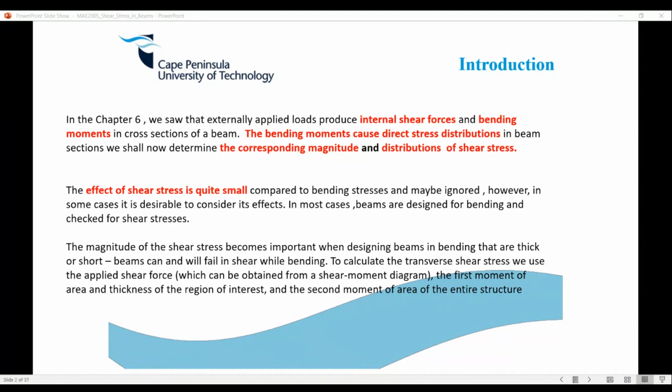And let's move on, so yeah, I'll get that slide shifted, which I'll shift. But anyway, right, so when we're looking at a beam being loaded, let me just quickly copy and paste the beam here, just for my own sanity. I must tell you, sometimes you guys really make me feel sorry for you, man - the amount of work you guys have. But anyway, sorry. Where is this? I'm just gonna find a random beam, just bear with me.

Oh man, now it's sticking, I'm not getting what I want here. I'm just gonna choose a beam here. Let me just go to the end. Yeah, this is just some mock-up, don't worry too much, just a picture of a beam. I just want to paste it because when I talk about it, you guys have some image in your mind of what I'm talking about. Okay, I've got a beam here. Yeah okay cool, I'll just take this beam here.

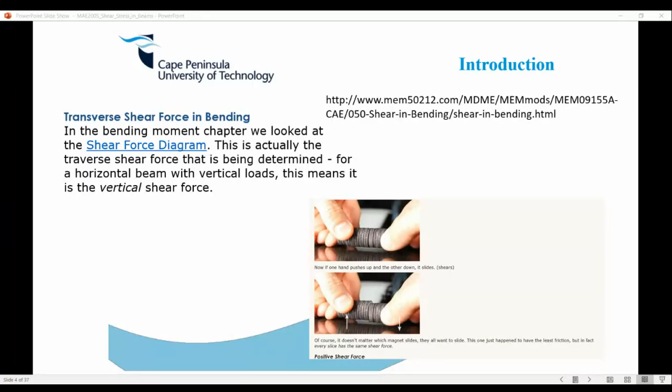There are two kinds of shear force we'll be looking at. The first one is the transverse shear force, which is essentially the vertical loads on a horizontal beam causing vertical shear. This is from the website I was talking about, I'll just paste it now.

It's titled longitudinal shear in bending. It says in addition to transverse shear force, a longitudinal shear force also exists within the beam. Evidence of this longitudinal shear force, parallel to the beam axis, is shown below. So this is what we're looking at.

Imagine some planks laid on top of each other. In figure A, we apply a load, it begins to bend, and we find in B there's some sliding happening between the surfaces of each plank.

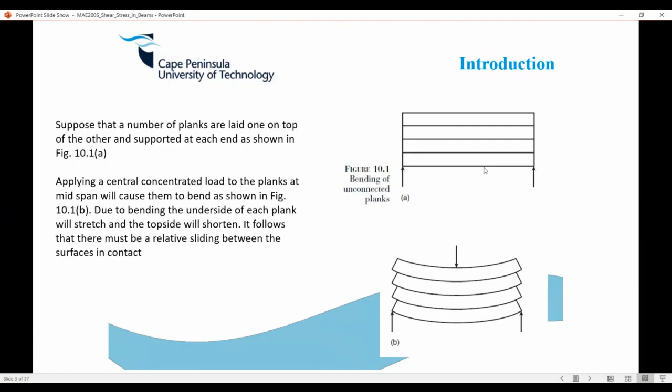Applying a center concentrated load to the planks at midspan causes them to bend, shown in figure 10.1b. Due to bending, the underside of each plank stretches and the top side shortens. We're familiar with that. It follows that there must be some relative sliding between the surfaces in contact - a very simple way of putting it, that's basically what it is.

Because of this load, and the way the material structure works, we've got this horizontal counterpart happening. Using the same example, if the planks are glued together, no slippage occurs, and the glue which keeps the beams together induces a shear stress.

So it sounds like a bit of a vague concept, and I can agree. However, there is a real reason why it's there, and if you do more advanced things, it actually becomes more obvious. So I'm making you aware that this transverse shear is basically related to longitudinal shear, and based on that there's a relationship between the two of them.

What they basically say is that the transverse and longitudinal shear forces produce stresses called vertical and horizontal shear stresses. So what tends to happen - you take a small element, load the beam up, and you find there are shear stresses on all sides of the beam, the vertical ones and the horizontal ones.

This is a new revelation. These stresses are shown on a small part of the beam in the figure above. At any particular point in the beam, the horizontal stress is equal to the vertical stress, so fortunately they have the same magnitude, meaning we're able to compute them.

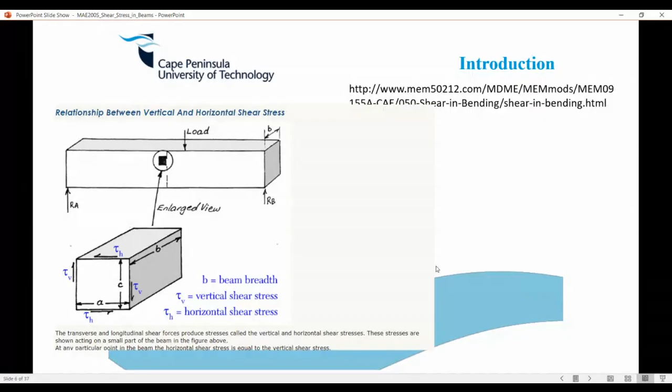Just be aware that even though the beam is going to fail vertically - that's the vertical shear or transverse shear - there's also longitudinal shear forces. Now I was going to touch on that one, okay, this is going to continue there.

This is just continuing on the same thing. I've referenced that over there. I'm going to touch on maybe one or two examples I found last night, so I'm excited to use one or two there, basically just proving that the shear force is the same - be aware there's a vertical and horizontal shear force happening.

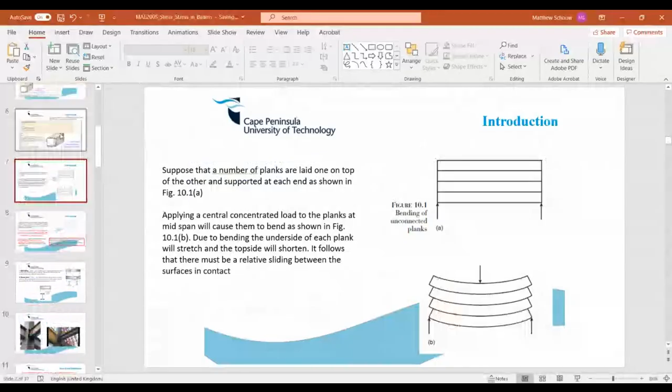In keeping with the previous slide - this is where this was supposed to be, I actually just added the slides, hence the jump around. So this is touching on the same thing, basically telling you again that there is this so-called longitudinal shear force within the beam.

It's important to note this is important in the design of connections, say between a concrete slab and the flange of an I steel beam, where connections - usually steel studs or bolts - are subjected to horizontal shear. This is particularly important more for the analysis of joints we are doing.

If you've done some analysis, which you're supposed to do in connection design - looking at rivets, welding joints, and bolts - there's a whole essential materials analysis based on that. So this horizontal shear force, what we're going to compute, is actually one of the main criteria to look at.

I didn't touch on this in the previous lecture, but there are ways a beam can fail - in fact 6 different primary ways a beam can fail, or they can occur in combination.

One would be web wrinkling, and one would be fastener failure. In both cases, the web wrinkling failure is due to horizontal shear - you can pick up on the direction of that fracture line. The fastener failure is the same: there are horizontal shear forces, say a rivet holding the cover plates to a W beam, failing in shear. That's induced by the load on top, which is the longitudinal shear force we're talking about.

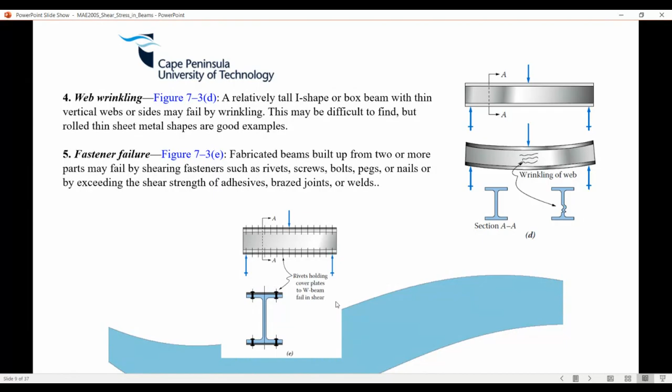What is the relationship between the shear force and bending? Think of the shear force and bending moment diagram and tell me some relationships about it, in terms of like if you had a graph or something. Maybe I can find a basic one here. You can tell me.

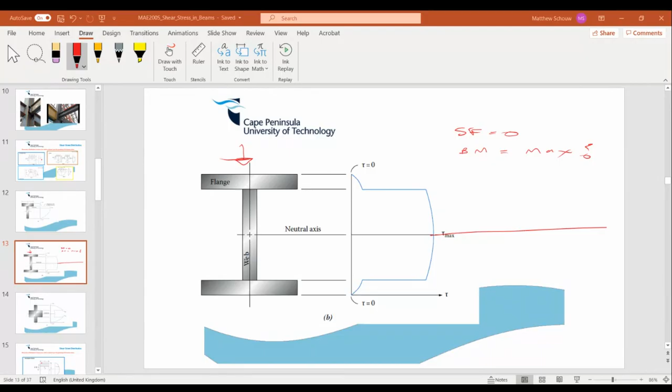Assuming we're applying a load here, obviously, the standard - how did it look like? You guys remember? It looked like a trapezium, didn't it? Or like, not like a Z. It looked like a... yeah, there we go, that helps.

I think what I'm looking for is, its top is being compressed, right? The tensile top is being compressed, so let's just say a line like this. Oh man, yeah, you can see my graphics tablet's pen is here, but anyway. So I had these so-called trapezium shapes or right angle triangles - some call it a trapezium as well.

What is important to note is that you can see at the top, the flanges carry where the shear force was 0. We found out that the bending moment is a maximum - it makes sense. And at the bottom, at the neutral axis, where basically no bending occurs, you find a maximum shear force. So that's a new revelation. And what's important about the I-beam, although it's designed - you might get a free bonus mark question - is that the flanges carry all the bending and basically the web carries all the shear. That's how they designed it.

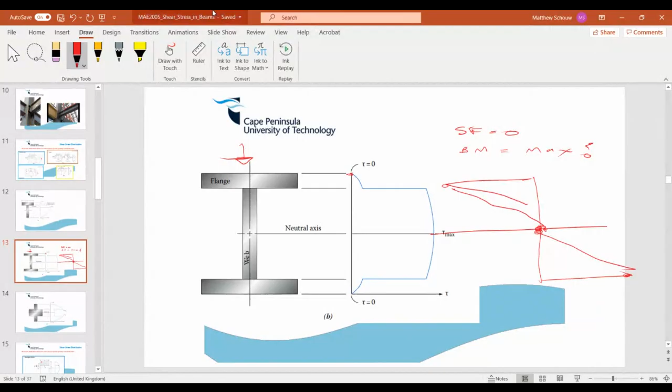Obviously for this it'll be completely different - we had a different case over here, an I-beam like this. So that's just a new revelation on the so-called shear stress distribution. I want to make you aware that you will be required to compute the distribution for an I-beam, so you should really put a lot of emphasis on mastering that.

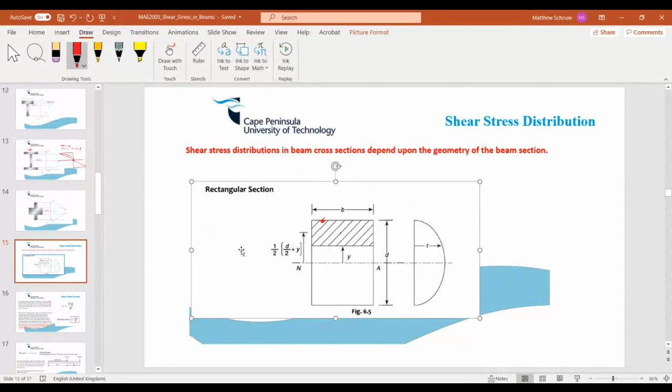I did mention that the shear stress distribution in the beam depends on geometry. Yeah, we had to look at a few of those anyway. So finally, what's missing here?

It's just the derivation of this, and I don't want to spend too much time on that. It is in a note which I've posted, and it's arguably self-explanatory. Obviously, you don't have to know all the how it's actually done. There's a few notes I've posted, and I'll just copy the thing here. It'll look like this.

If someone can find this textbook, really, I will be eternally grateful. I really don't know what textbook it is. I'll just quickly duplicate this and paste it here. So it's not really of importance, but it's one of the notes there.

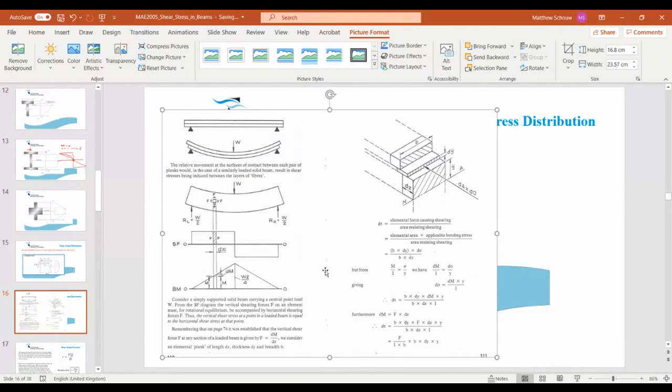And what it is doing here is basically showing you how the formula which I'll be talking about now has basically been derived, right? So you can have a look at that. And the main model we'll be looking at is this guy over here. I'm sure it's in your textbook, you've seen it.

And it's going to be, so it's basically your shear stress. To find the magnitude of it, it's going to be V, which is the maximum shear force, A, which is your area of the particular section you're looking at, Y bar is also with respect to that particular section we're looking at. And we divide it by the second moment of area, the total second moment of area of the object, times the breadth of the object, right?

So we're going to look at basic shapes, so at least if you can master those, you should be okay. They're saying, so in the normal other types of, what's the word I'm looking for? Man, I'm getting a headache of this now. Just bear with me, sorry.

Okay, it does work now. Let me just quickly see. Yeah, it works, okay.

They have AY as Q, however we just use it as AY. So Q, AY, but this is the one we use here, okay?

This is just a small note here, but they say determining Q or AY is the more challenging part of these problems. This requires a lot of practice, and I agree, a lot of people get confused on how to take that particular thing. Obviously, I'll try to break it down as best as I can so that you understand, and of course delineating the sections.

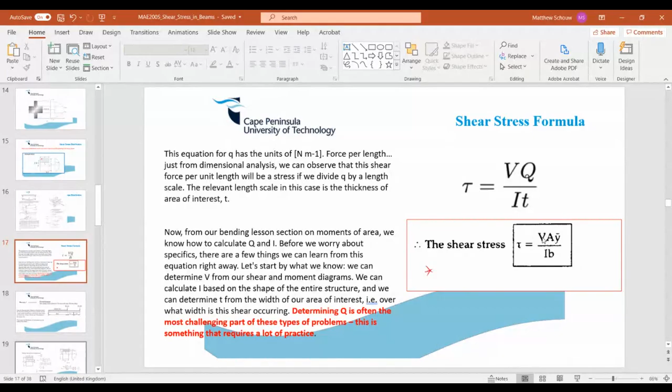Okay, so we can finally start on the first example. If you do want to follow along with your notes, maybe this is the first note in the additional notes. It's called additional notes on shear stress beam in Beams 2. You can download it and have a look through it.

I love this note really. I think it even has very nice questions here. But I really want this textbook though. Someone can find it for me, I'll be eternally grateful. I've been looking for this textbook.

So you can just get that note ready, and we can actually start solving the problem. So we're going to actually start solving now, and I think getting on. So I hope you guys got the basic concept, obviously.

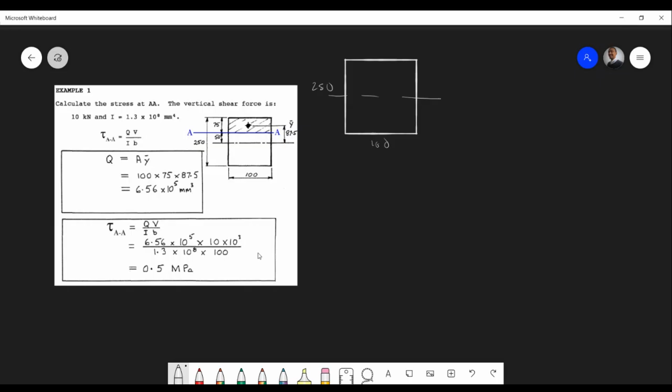We have this beam, and they give us a vertical shear force of 10 kilonewtons. So they give you Vmax. Normally they'll give you Vmax, or I'll request you to work out Vmax, and I'll demonstrate those times when we have to work that out. And obviously we have I here, normally we have to work out I, but fortunately they've given it to us. So it's 1.3 times 10 to the 8 millimeters to the fourth.

So in our SI units, what is that? Can someone just work that in meters for me? So this is like a teaser of some sort, of how this works.

Our formula is like this over IB. So can I just get the I beam? Obviously the I is worked out the same way as before. We know the BD, we can actually work it out now. Maybe let's just work it out. Let me just get my calculator quickly.

Where is my calculator? It's in the car. Okay, so I'm just going to work out my second one. It should be the same. I'm just using my Casio here on the computer.

So it's going to be 0.1 times 0.25 cubed divided by 12. We all can do that. Obviously, depending on the XX, so it's 130 point... no, it just went away. Times 10 to the power minus 4. 130 how much? I want to times 10 to the power minus 6. So it's 130.208. Okay, so yeah, anyway, it's the same thing.

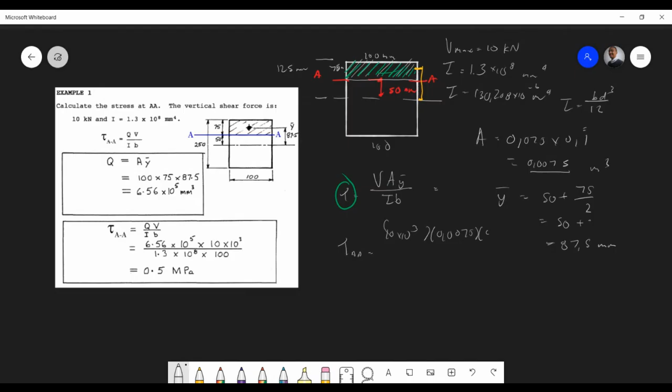Y bar is 0.0875. I beam, it stays constant, which will be the 130.208 times B, and B is 0.1. So B is this counterpart for this approach, it stays constant, right? And so we can get AA.

But you're going to find the magnitudes are normally very small, and that is why they have somewhat negligible effect on the beam. So you appreciate once you start getting into the bigger stuff why this is important. Last year was a challenging time. So what is that shear stress in section AA?

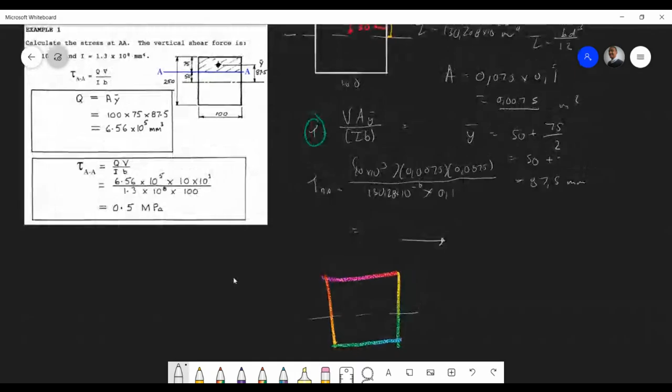Can someone give that to me?

Okay, 504 kilopascals. Beautiful, right. This is well within 1, 2, 3, 4 marks.

So what I want you guys to do now for me is quickly compute the shears in section BB, and BB is 100 millimeters away from the neutral axis, right? So that's BB, just a quick exercise to warm you up.

Thank you, Mr. Kiefer, yeah that's a lot better. So can you see small magnitudes, right? Doesn't affect much in the beam. It's not within the 200, 300 range - megapascal, this is kPa. So very small effect.

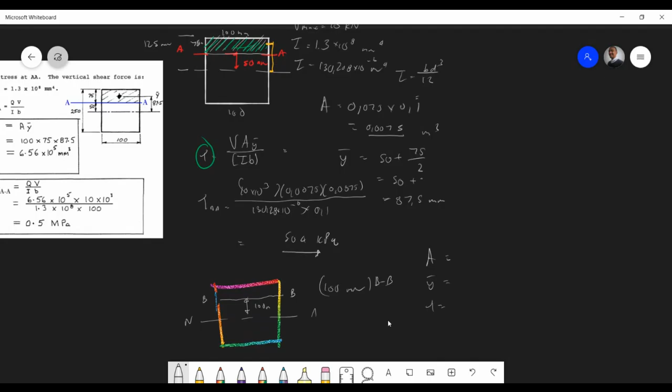Yeah, but you know, anything happens with you guys. So for this one, if we're 100 millimeters away now, the area in question is going to be this over here, right?

And obviously that's still going to be 100. That's going to be now 25. So that's your new area, it's 100 times 25, whatever that is there. Obviously it's in millimeters squared.

Mr. Keeper, can I ask you, how do I know that answer is correct? How do we know that answer is correct? Because I gave it to you, sir.

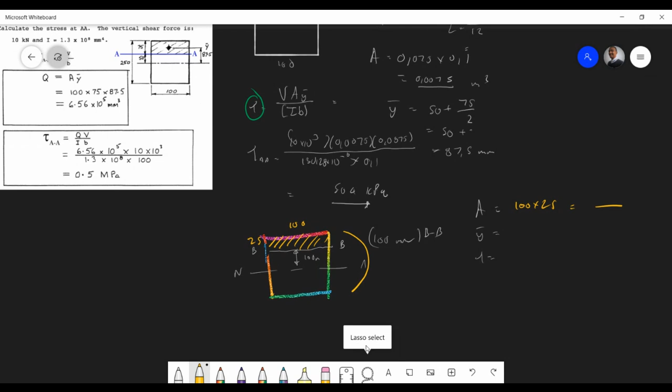Yes, for sure. Yeah, I don't know. Give me a second to think about it. It will be proportional to the first answer we get, because it's all on that same triangle.

So there's some proportion - on the left, on the equal sign, is equal to what's on the right on the equal sign. So I think what I want to say is decreasing. Remember, there's no shear force there, and it starts basically decreasing as it's going up. We're actually going up along the beam here. Doesn't make sense - so the maximum will be here.

But obviously it is proportional with that shape - the shape is a parabolic shape, by the way. But yeah, I'm happy with this answer. There's 216, so it's 216 kilopascals, right?

So there's a small exercise like this which continues along the length of the beam. I think that's what we'll be doing. Okay, so I'm quite happy with that. So if you're able to understand that concept, especially with the areas, that's a good thing.

And then touching on the next example, which I'll just move along here. It's also from the website, so I highly recommend you checking the website out.

I mean, when I just found it last night, you know, it's one of those things - I'm glad it's just breaking down these concepts for me.

In this case, it's the same beam, and we need to find it at the neutral axis. It's the same exercise as before, but when we find it at the neutral axis, we consider the whole area. It's the same amount of force, everything - same example, so we just find the whole area.

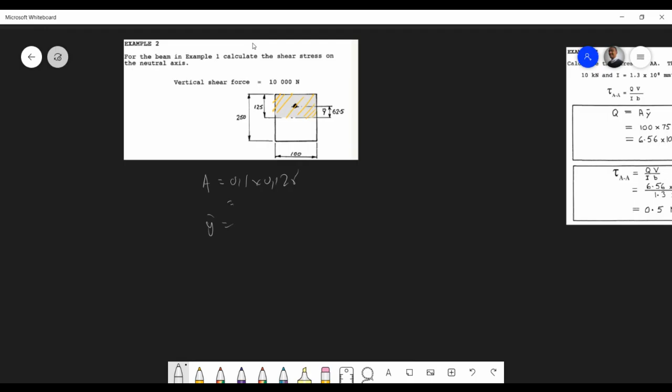So to find the maximum one, we know the area now. It's going to be 0.1 times 0.125, that's the whole area. Your y bar, which is for the whole area, is basically 0.125 divided by 2, which will give you 0.0625. And your maximum shear force will be 10 kilonewtons.

Which is given in this case for this example. You've got your area 0.1 times 0.125 times 0.0625, and divide that by IB. And IB was 130.208 times 0.1. Okay, you guys got that?

So what is my maximum shear stress there? The answer is on the website.

Share with you guys. What do you guys get?

You should have got this answer. Okay, where is it? I'll just check your guys' answers, but here's the answer for it.

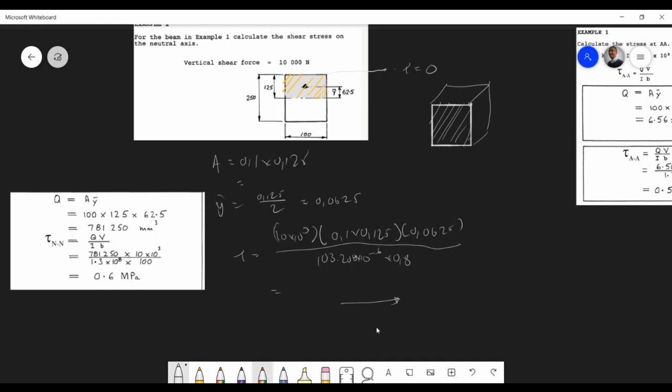There's no shear forces if you think about it, because this is the cross section, the beam is shearing across that area, and over here there is no area to shear. So you must think of the force acting like this - maybe I should have it like this, and then the force is acting here or something.

Okay, cool. We can move along. So guys, are there any questions? What's important is the so-called Q, the A times y bar. It's the first moment of area. Are we all happy with this? Any questions before we move on?

Any questions, students? Thank you, Mr. Hermanus. So like I said, your rectangular beam and your I-beam are the beams in question. Maybe a T-beam, but I highly doubt it.

Sir, so I want you guys to - yes, on the shear stress here. I'm seeing down there 0.8. Is that - no, 0.1, sorry man, okay? I don't know why I'm scribbling. Yeah, that stays constant. Okay, thank you. I'm not sure of the exact answer.

All right, so we're nearly done with the first half of the session. Well, is it the first half? There's 3 parts, I think, of the session, if I'm thinking about it. Okay, so if you have that concept, well done. And we're moving on, right?

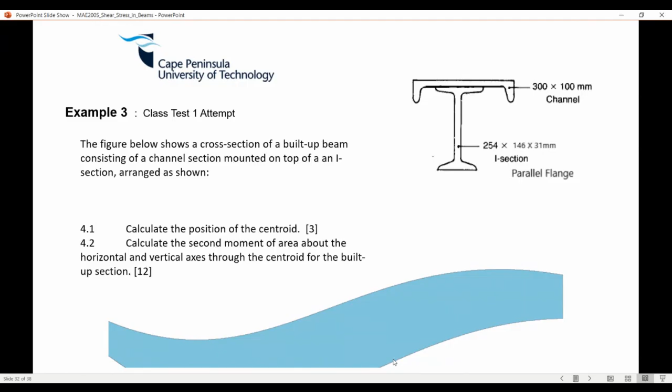This is a different animal on its own. It's not a big animal, it's used in combination with second moment of area. This is from your first class test, so I'll explain how it basically works. Once I go over the whole lecture, you'll understand, okay, it's not that bad. It's really not that bad.

But I want you guys to just try this one. Always be conscious, this is the one I'm telling you now, please pay attention. Please be able to draw your shear force and bending moment diagrams. The beams might not be that complicated, but be sure you can draw it. It's very important. You're going to need to find your maximum bending moment and your maximum shear force, which you're going to use for other analysis. So I'm making you aware, you might lose critical marks by not being able to do that.

That's why I'm giving you an example like this, so you're aware you're going to get a beam, you can get any beam. And the cross-section area will be, maybe for the shear stress for instance, a rectangular or an I-beam. There's only 2 you can get, and you need to conduct analysis. But this part will change, obviously.

So I'll give you guys 10 minutes. Try to find at least from 0 to 40, and then I'll solve the rest as I go along. If you have time in between, you can check the notes I've posted on Blackboard. Anyway, just have a quick go with this. I think this is a small exercise, a very good example as well. Easy, easy, easy. See you guys in the next 10 minutes.

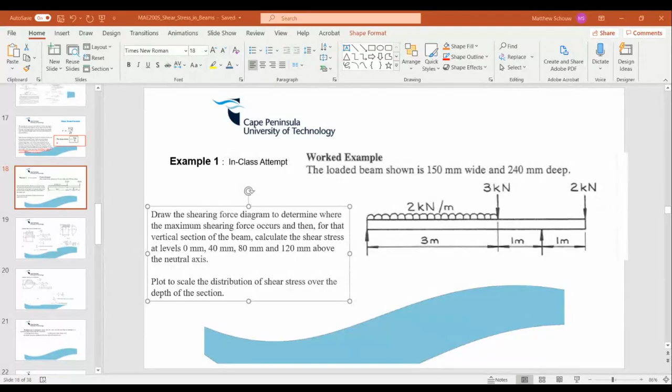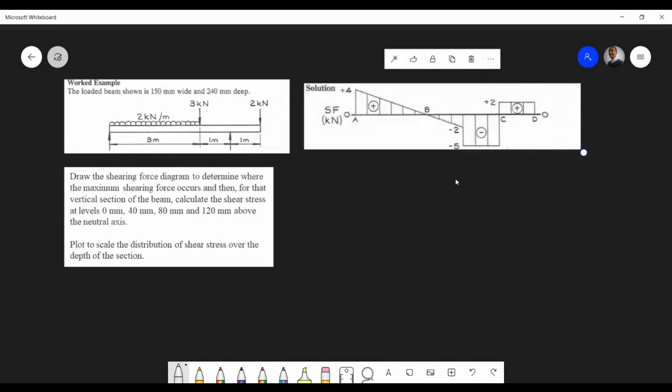That's where people are out. So if you look at the notes there, I'll just quickly show you. Your maximum shear force diagram should have looked like this. So something like that, right? Obviously I'm assuming everyone can find their reactions here, it shouldn't be a problem. But the value you should take is the highest value, which occurs on the diagram over here.

So I'm hoping you guys can do this. You've got to first find the reactions, obviously, and then based on finding your reactions, you need to find the shear force along the length of the beam. So they've used A, B, C, and D. Normally it's obviously guided for you over there. So just be very aware of being able to find that.

Mr. Kiefer, was your shear force correct? No, it was horribly wrong, but I forgot that we had to start at the left-hand point and plus and minus everything. I got 11, I just added everything going down. So I thought, okay, what's going down is going up, so that must be shear force. Yeah, so I've picked up that tends to destroy a lot of students. I'm making a point, make sure you're able to do that.

Okay, cool. So once you have your maximum force, it's going to be on your diagram, and your Vmax will be, in that case, 5 kilonewtons. So obviously, if you have this, you'll probably get a few marks for that, 2 or 3 marks depending.

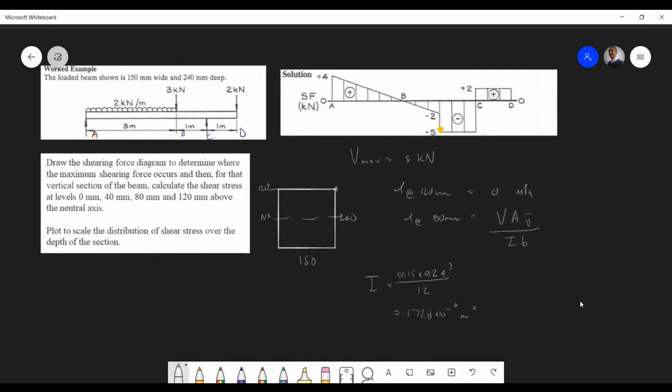Now obviously the AY is the so-called tricky part. In this case we are 80 above. So if you're 80 above, that means this will be 40 over here.

So I'll write this here: shear at 80 millimeters is V is 5 kilonewtons. That area is going to be now 40 times the width, 40 times 150. That's very important, you can make a mistake with the areas.

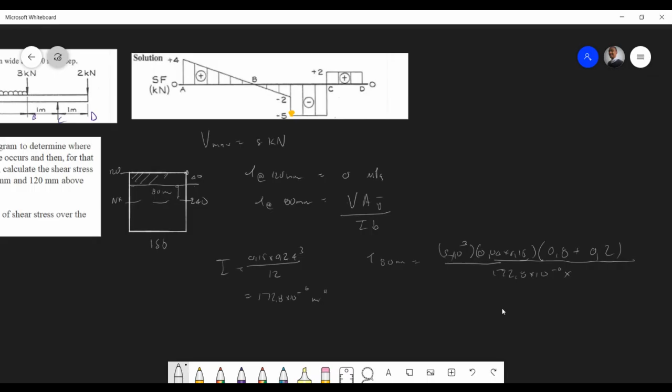So it's 0.04 times 0.15. And obviously now we just need a Y bar. The Y bar is going to be 80 plus 20, which is 0.1, so halfway. And then I is 172.8 times 10 to the negative 6, times B, and B stays constant at 0.15.

Okay, so let's get my shear at 80. Someone give me the answer, I hope I did it right. We're just going to do it until the neutral axis. But it's a good demonstration of what you can somewhat expect, especially with the area stuff. You'll see.

Okay, so we're going to move nice and fast after this. Let me just quickly check - 100, yeah that's fine, that's perfect. 115.74. Once again, you can see how small it is, very small.

The next one, so the shear at - what's the other one again? Where are we now? Yeah, at 40 millimeters.

And so obviously you want to sketch your thing. Let me just resketch it, let me be accurate. Again your beam, neutral axis - this is going to be 120. So we're 40 above.

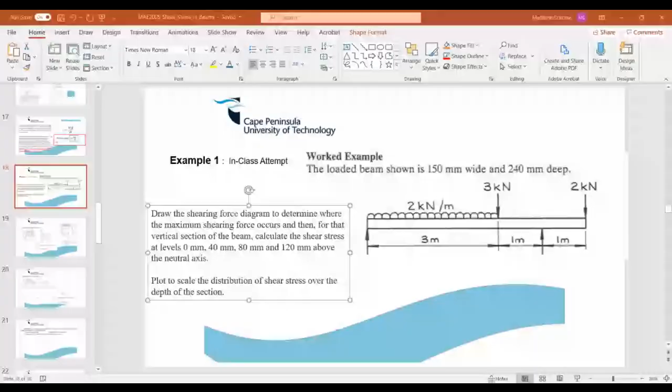So now I'm going to head back to my slides. Is there any questions before I move on? You have the answers to this, there's a note for it, so don't worry, we'll go over it.

Any questions, guys, before I move on? Yeah, that's the max, yeah.

I mean, obviously, sorry, I didn't mention, you have to sketch the distribution. Obviously the distribution will be something like that, yeah. So I don't want to waste time on things I know you guys can do. I don't know, looks like this—obviously you have the solution so you can figure that out.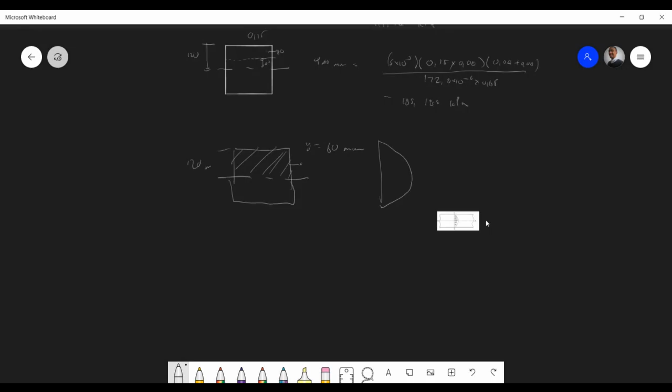There's no tricks, you just have to know, yeah. It's very procedural. Okay, so this is what you're expecting—you see, that's what the distribution looks like.

And remember, it's fine, I don't want to talk about that now. Just keep focused. Okay, thank you, Annalisa.

So guys, we passed part 1 and we're heading off to part 2. Let me just end part 1 first, and not say too much. I'm just going to share this thing now.

Okay, so we just did this one, and now where I want to take you guys is here. Sometimes, in fact, there's another note. In the first note, they've basically shown you a shortcut version where you can find your maximum shear stress, and to find the mean shear stress, you take F or V divided by BH, so you can find your mean.

And if you actually want to find your maximum shear stress, you times it by 1.5. This is like the basic shape they already derived, and a parabola is 2/3 or something. So if we take for the same beam V over BH and get the mean, and times it by 3/2, we should have gotten the same answer. We're going to play around with that now quickly.

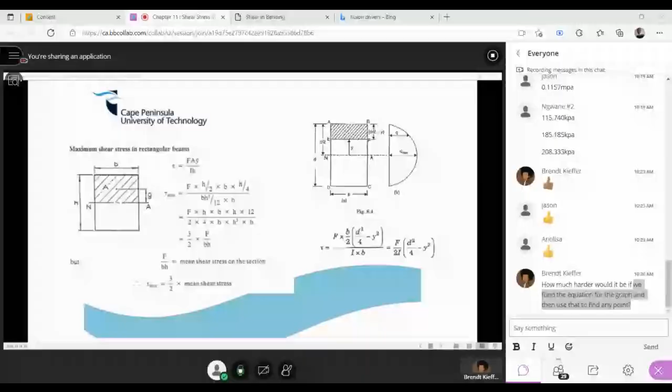Obviously the first part of it, yeah. If you look at Trotsky, the chapter is quite small itself. So I just want to show you evidence that it works, because the I-beam has its own set of stories which you also have to remember. So I'm showing you the concept of using a rectangular beam and building it up to a more difficult beam.

So yeah, let's quickly corroborate our answers. What we're going to basically do is find the maximum shear force, so it's 3/2 using this formula over here first. What's the mean? So it's 5 kilonewtons, I think, divided by bh, and b was 0.

What is B again? 0.15, and D is the entire depth. So the entire depth, how deep was the beam? 0.24. What answer do we get for the shear max? Can someone work it out for us? 0.24... oh, 0.28? What was the shear max again? Oh, we didn't work it out. But it's there, yeah, it's 208.33 kilopascals. Exactly the same if you found it.

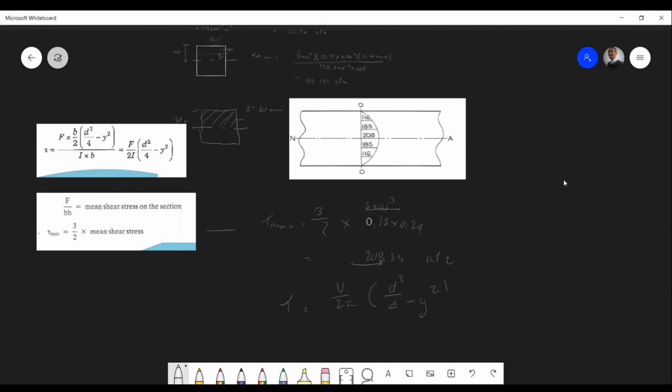If you want to use your formula, with experience you remember this. I'm not going to give this to you. You can have this formula and work it across the beam. So it's V over 2I d squared. I just want to use one data point.

Let's use 80 millimeters away from the neutral axis, at 80. So you have V, so it's 5 kilonewtons over 2. What is I again? I can't remember my I value.

172.8. This is the general formula, and D was 0.24 squared divided by 4. So why math is beautiful, we can have chain relationships. And we're going 0.08, and obviously we're expecting the same answer there. What do we get?

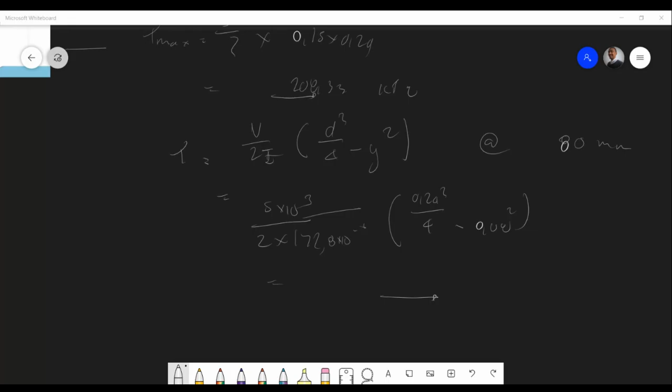Mornings. So what do we get for that shear, 180? Do we get the same answer? Mr. Abril? I'm just greeting too. So what's the answer, guys? Come on, man. I don't want to end up doing something, you guys, is it the same answer as before? 100 and what? Yeah, beautiful, beautiful, beautiful.

115.74. No need to write that down.

Okay, guys, are there any questions? Because now I've built the foundation for what we're going to do now. I want you to understand this is not a difficult chapter. It's small, I just didn't like the way Trotsky explains it. But if you understand it, it's literally free marks. You can sit with a good 15 marks for a question like this. Any questions before I move on? We're ending off part 1. No questions? Can I get a few thumbs up before I proceed?

What is y? I don't understand what it means. What is what? So I'm asking, what is your y there? It's squared, it's like 0.00 something. What is it? 0.08. Remember, y is a distance, like what I was trying to show you, any distance away from the neutral axis, that is what y is. So you could have done it at any position and seen the distribution across the beam. There's a general formula which you're expected to know, and I'm not going to give it to you. Otherwise it's too easy.

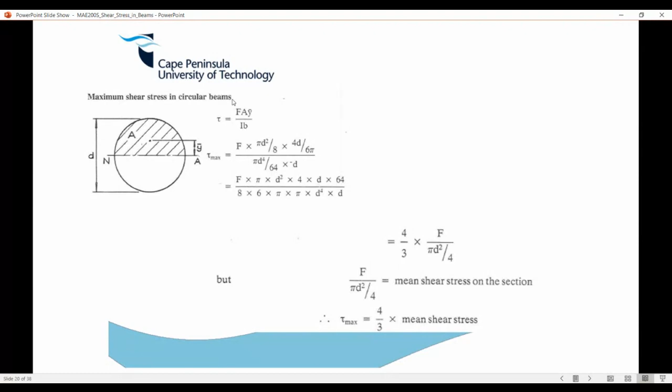Yeah, so there is one for a circle as well. Anyway, okay, this is an example, don't worry about that one. So here we go into the I section, and we are doing something exactly similar. What's important to note is how the distribution looks, and maybe you have a bit of experience now from what I've taught you, but it's kind of implicit that the flange is the top part, and the web is that middle section. And how you normally find this is we find it in the upper flange, we find it in the lower flange, also top of the web, we find it in the web, and we find it at the neutral axis. So that's how the typical distribution for this looks, and that's the standard procedure.

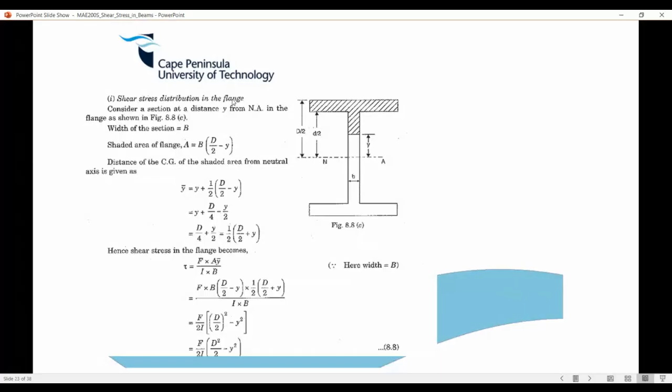So again, with the same thing, we have formulas as well which you can use for the, we have questions here. But I'm telling you now that the same way we have the formulas for the rectangular beam, there are general formulas, but what you must be cognizant of is that one works for the flange - you find the shear stress distribution within the flange.

So for the upper edge of the flange, speaking in general before we do an example, since you guys understand the concepts: that upper edge of the flange is there, lower edge of the flange is there. It's also titled the top of the web, and obviously this is the web. So you're explaining in this text, and you have that as well - there's no formula for it.

It nearly looks the same as the previous one, hence me doing it. And then for the lower edge of the flange, you have V over 8I, which is this over here - D squared minus d squared, and also you have the distribution within the web itself.

I'll teach you from first principles. You can also find the maximum shear stress, which is equation 8.11: F over IB, times BD squared minus D squared over 8, plus BD squared over 8. So big D is the distance from the upper edge, and small d will be there. I'm outlining the formulas before we actually do it.

But I'll show you the first principle method, which is what you kind of want to know anyway. You can use the other formulas as backup to make sure you're doing the right thing when solving these beams. So this is like part 2 - the two beams you're going to be focusing on.

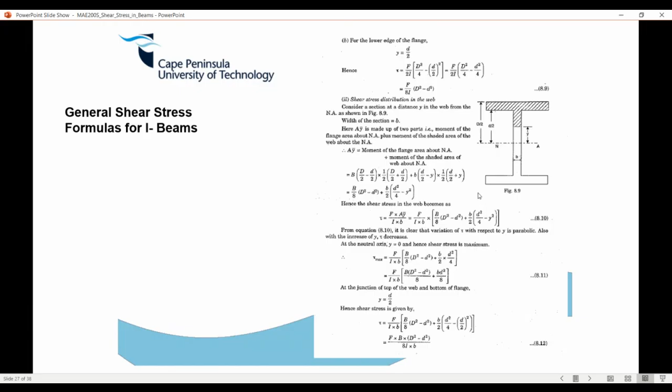There's a few formulas here, but don't worry too much. That's why we can do the first principles - it's obviously a lot easier.

Out of the same textbook, there's another example we're going to do now, for an I-beam. After this example, we'll use the same approach for the example that was initially in Trotsky. We'll try with our newfound knowledge, treating it as an exercise to solve that. I'll show this one first and want to use the same approach for the Trotsky one - very important, guys.

Whatever we did there, whatever we did here, you need to know how to find the shear stress distribution within the beam. And the way the question is structured here is a very good way of how it can be asked.

So either you get a beam and have to find the shear force yourself - I had a question like that at the end somewhere. You find the maximum shear force, then sketch the distribution. You sketch the bending stress distribution, which is easy. I also added an extra part: sketch the bending stress distribution with a 15 kilonewton load applied through the beam axis, like a direct load. You have your direct counterpart and a bending counterpart. I don't know if it makes sense how a question can be amalgamated into one.

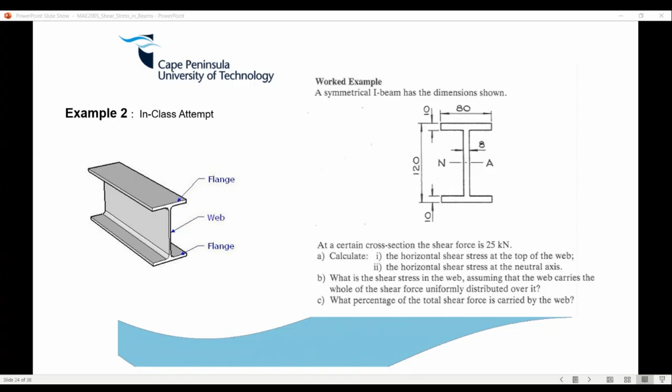Let me prepare the example on the whiteboard. I'll send you a few examples on this. Once you've mastered it, it's basically over - like I said, it's not too difficult. There's no tricks, it's very procedural. If you don't know how to do it, really, it's not on you.

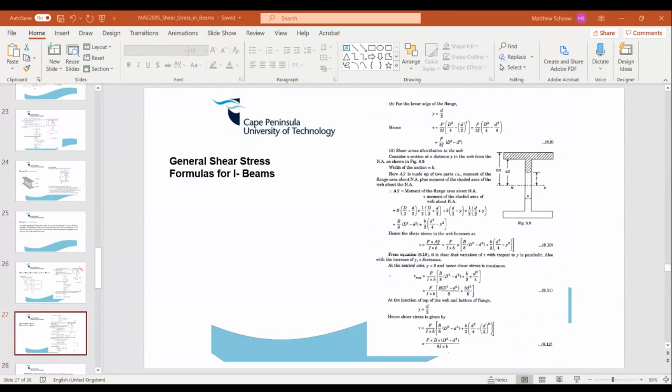The only tricky part is figuring out what beam you get. So let's do the I-beam quickly - I just saw another way of doing it, and it's very fascinating, actually.

First thing is finding the second moment of area. We assume that remains constant through there - this is also in that other text. Fantastic, I assume we all found that, and I don't want to waste too much time since I did touch on that. To find this, you take the outside section, the 80 and 120, and subtract this. You guys are all mature now, so I can move a bit faster on certain things.

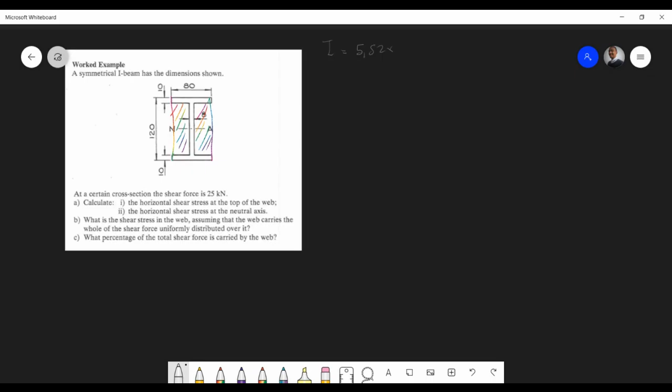Here they gave us a shear force, but always be cognizant that you'll have to find that through getting a beam - just for the ease of the example. So 5.52 times 10 to the negative 6. Are we all happy with this value? Do we all get this? This is also preparation for your test.

So top of the web, that's up - let's find up, let's try to find in all elements here. Are we all happy with this value? Anyway, guys, I wish I could give you a mark for the formula - that's how we start, IB, right?

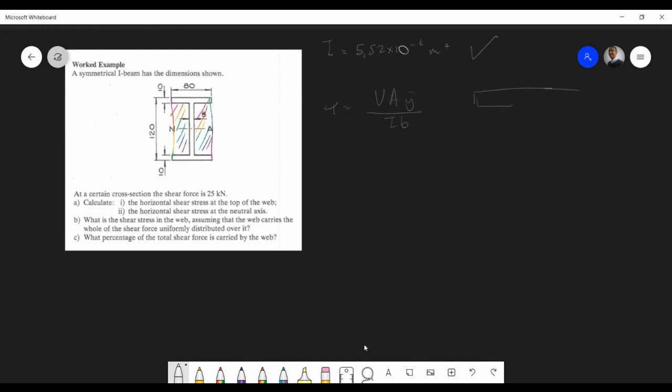Now for the first part of the question, they're saying the one on top of the web. So I'm going to have my sketch here - top of the web means here, okay? Neutral axis is somewhere here - it's always halfway the beam. Just for each segment, you don't want to make things too difficult here. So top of the web could also mean lower edge of flange.

On the upper edge of the flange, the shear stress is obviously 0, and we can find it midway as well. But in this case, we are finding it on the top of the web - anyway, I hope that's correct. On the top of the web, let me just quickly see here.

So they're asking at the top of the web, so it's a bit trickier, and you can understand why, but I'll explain to you. What they're saying is a bit weird here, but I'll explain what I mean now. First things first.

We want to find it there, and the area in question is obviously this guy, so I'll make that green. Let me get my dimensions in here - so we've got our 80, our 10, and what's half? Is that 60, right? The neutral axis - what's half the beam? Yeah, 60, it looks like 60 to me.

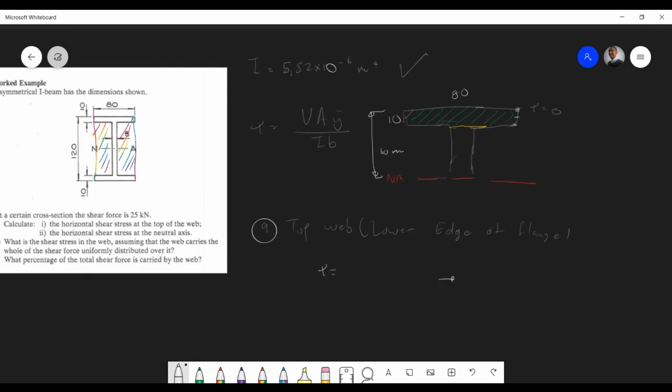I want to see if you're smart. Using the same approach as before, you have your area of the section, your Y bar - 60 is the total distance, guys, looking your way here. Get the Y bar, and your breadth, and so on. Let me see who can get the answer - it's all in your notes so don't worry too much, I just want to see. I have a slight problem with the question, but anyway, it's fine, we'll talk about it. Let's just get your area, your Y bar, and then your shear stress - I'll give you guys around 2-3 minutes for that.

Beautiful, beautiful, beautiful question - beautiful question. Do it for both, beautiful question - the man has genius level analysis. Do it for both if you're not sure, and that is where I'm heading into, obviously.

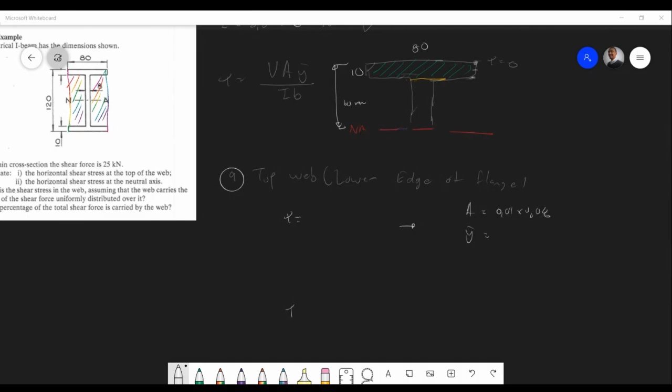You guys agree with me? It should be 55 millimeters. Y bar is 55, 0.055. And then we compute that, you got 25 kilonewtons.

Area is 0.01 times 0.08, 0.055. I will remain constant, as we said, 5.52 times 10 to the negative 6. And then B is obviously going to be 0.01. And if you do that, you should get your answer. What answer do you get for that?

Is that the 2.49? No, but oh, the thickness. Sorry, yes. That's not 0.01. I'm talking nonsense.

The thickness we should use is the 8. We should use the 8. Yep, I don't know why, sorry, it's 8 times 10 to the negative 3. So I didn't include the thickness there. So that's 8. So you get 24.9.

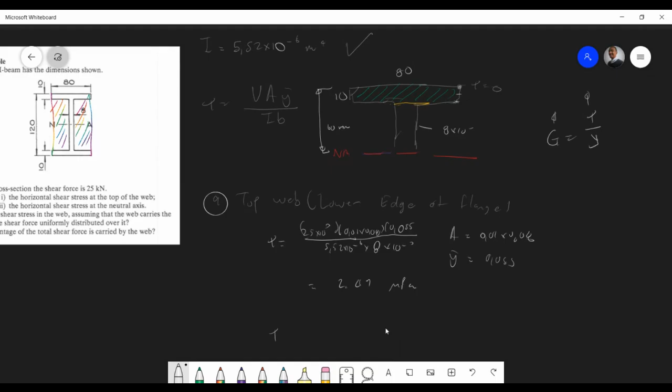I have to really look at what you're saying. Okay, so this is... Now I just want to make sure, do you guys get that answer? Because I'm not really concerned, man, let me just quickly see here.

What area did you get? And what area did you use? So it's 24 point, yeah, it's 24.9, right? Is that correct? That's the answer you think you got for this one.

That should be right, because I think what I did, I used 0.08, so 80, so that would be the shear stress on the flange, not on the web. Now you have it, so it's not incorrect. So how did you get 2.49?

I don't know, I used my area. Yes, go for it. 0.01 times... yep, it's basically 10 times 80, man. 10 times 80. Yeah, and then your I, your Y bar, times your Y bar, was your I times 80. I times 80, yeah, so 5.52 times 10 to the minus 6 times 0.08.

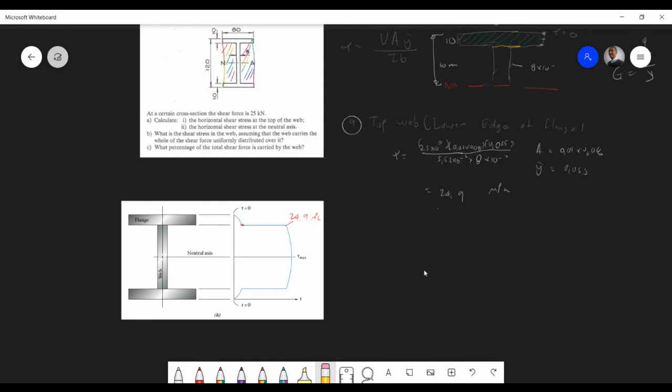We have yet to find this guy here, so making you aware of that. That is what I was trying to highlight, but I just remember the question itself brings out that. So now, before we get to the horizontal shear stress at the neutral axis, I want to quickly digress a bit. I hope I'm not going to confuse anyone.

So just keep in mind, well done, you've got this. This is correct - that's a mark, that's a mark. This is probably 2 marks. So for the next part of the distribution, that's probably 4 marks as well.

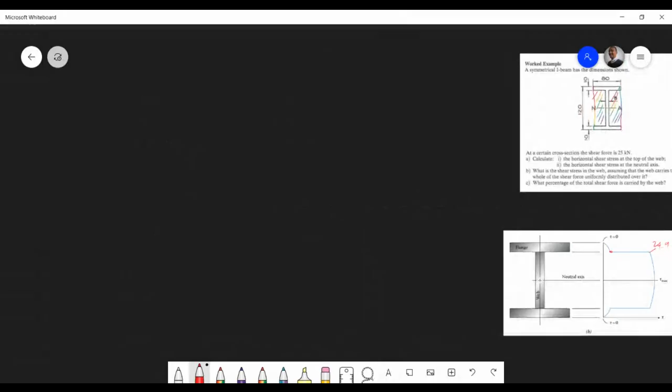Before we talk to him, we're gonna park him away quickly. I want to go to that website I was talking about. See, we are so blessed and lucky that we can find all these things to break up the concepts, because otherwise it becomes a bit weird. So we're gonna revert back to him - we sorted one part of it.

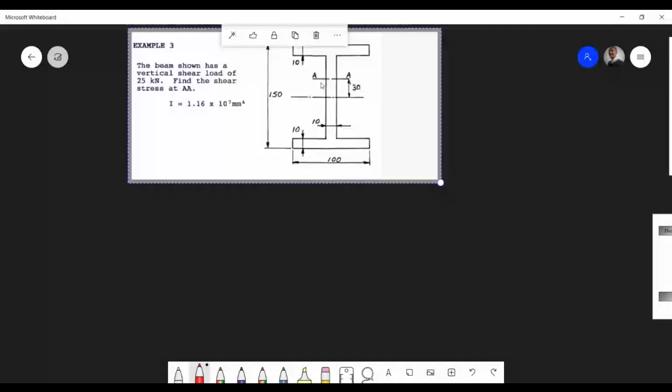So this is a classical case of another one - now to make you aware, this is an I-beam, and we are required to find at section AA. So what I'm going to drop you off with is the approach. I'm going to put this in the slides as well, and see if you guys are smart enough to figure this out - that's what I'm looking for here.

And the approach you're gonna have to take is this: with the I-beam, if you're finding a particular section, just give me a moment. We're gonna go on a break after this, and then conclude the lecture - just letting you know.

So when you're dealing with a section within the web itself, you're going to need to find the area of the first part, area 1, area 2, and that'll be your Q, your I, your A and Y part. That's why they actually use Q. So you have two areas to work on, basically the area and your Y bar. What I'd like you guys to do is try this one, and then we'll do the next one together. But I want you guys to figure out if you're able to do this.

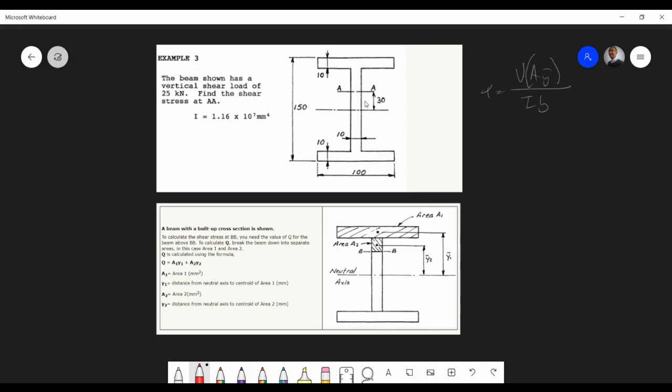What I'm also teaching is, if I ask you to find the shear force at 40 millimeters from the neutral axis in the web, you're able to do it, right? There's a general formula for you to play around with to see how the values work. But remember, for an I-beam we have two different areas - this is the first area, Y1, and we have to find the second area depending how far we are from the section. Okay guys, just try and find the shear stress for this one. By 11:05 I'll step in and continue the examples. Have a go.

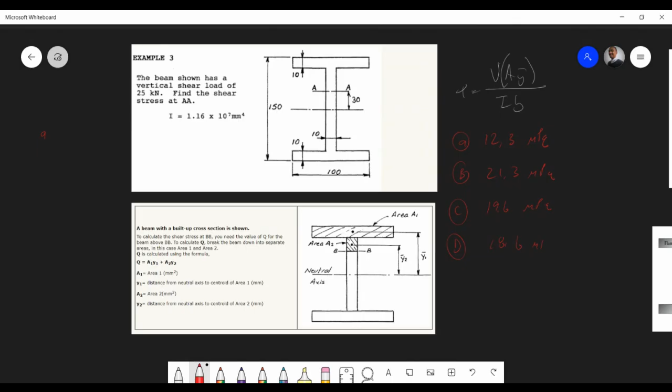So I left the answers there somewhere. Let's see if we can find them.

So obviously, I'm going to work out the AY counterpart - all the rest is easy. What you're required to do is take the first area, and that's going to be 10. I'm just going to have it like this. Maybe I should write it over here.

I expect you guys to really get this. So A1 is going to be 0.1 times 0.01. And if this is the first area, you're taking the Y bar from there. So if this is 150, this would be 75. What would your Y bar be? Obviously, anyone else besides Zach now - should be kind of obvious, right?

So minus 5, maybe. So that's going to be - obviously this is 75, and then minus 5, which will be 70, which will be halfway here. Okay, that's the first one. I should have just called this A1Y1.

Plus what we have to do is A2Y2, the second area, which is this piece over here - the second area is over here. In that case, let me just have a look: 150, 10 and 10, that's 130. So what is this distance from here to here?

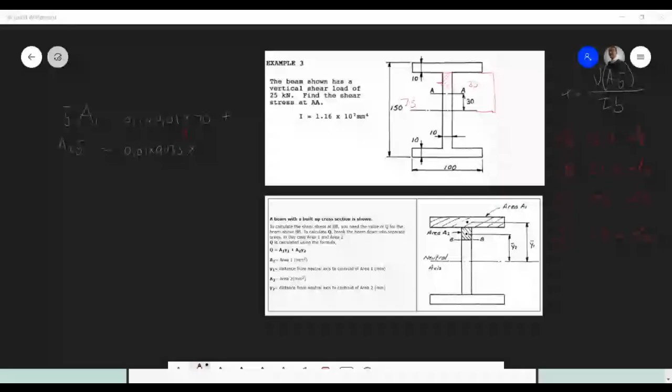Okay, cool. So if this is going to be 30, and that is 30 plus 35, so what is the Y bar in that case there? What did you guys get? 30 plus. I think your Y bar should be 47.5. Yep, thank you Annalisa, beautiful. That should be 47.5.

Okay, so if you've gotten that, what it should look like is this: shear equals 25 kilonewtons times 0.1 times 0.01 times 0.07, plus all of the others here, 0.01 times 0.035 times 0.0475. That is your Q, so to say, or your AY total, and you divide that by, you're going to divide this by I, which is 1.16 times 10 to the

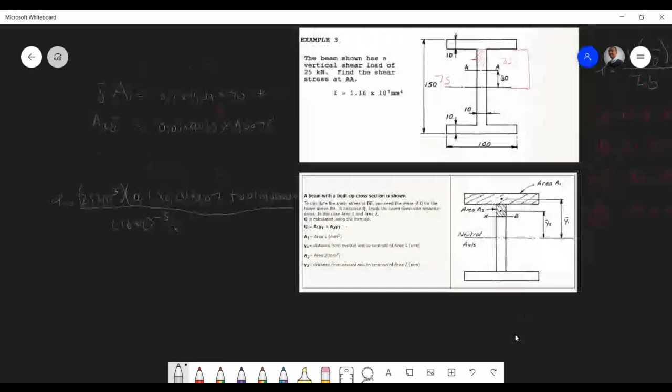negative 4, negative 12, I'm not sure, this negative 5 maybe. I think 1.16, and your thickness would be obviously, it's because it's within the web itself, so that's going to be 10 millimeters, which is 0.01. Okay, and if you get that, you should have gotten the answer of 18.67 or something megapascals.

You guys mentioned that, so what I'm just highlighting is finding this part over here. You guys mentioned that, I think Annelisa's probably got it. Any questions on that guys before we move on? Back to our normal example. So what I'm making you aware is when you're working with any section within the web, that's your approach going to be. You're going to have to take two areas now.

Any questions, students? Mr. Kiefer, Annelisa?

Yeah, I looked away for a second and I see you did it differently to what I did. Okay, what answer did you get though? I got the 18.669 megapascals, perfect. But I got the resultant Y bar because I can also do it that way, area moments to get one Y bar. Yeah, you can do that as well. Yeah, that is definitely correct, that's acceptable. Okay, thank you Annelise for responding.

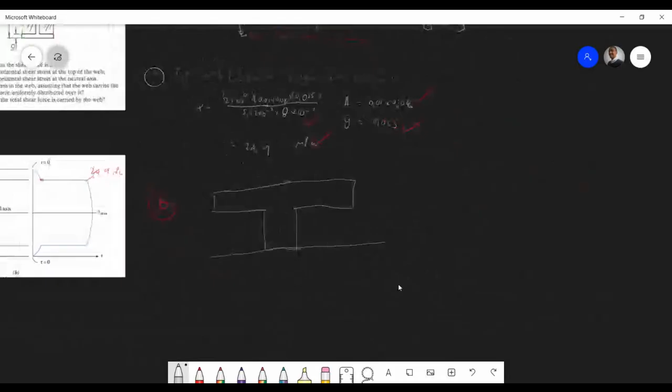So let me just get my dimensions. This is 10, this is 80, and that's going to be 8. So obviously we have to separate it into areas. This is going to be the one area, and this is the second one.

The way Mr. Kiefer did it, and this is also in your notes basically, so what you can do here for this one, the area total will be 10 times 80 plus, you can do it either or. What is this length again here? Is it 50, right? And that's 8 times 50. Okay, so we're going to find Mr. Kiefer's way of doing the total Y bar instead of finding the individual ones. It's really the same thing, hopefully it's not going to confuse you guys.

Let me just quickly see. Let's say, so it's 5 times 8, and the area should be 1.2 times 10 to the negative 3 meters squared.

Okay, and if you're finding the Y bar, you can find a total Y bar like you said. And that's basically the same as the other approach where we're just going to say the first area is 80 times 10, and then what is my Y bar from there? It's from there to there. Is this 50 here? I'll just get this right. So 80 times 10, and that's 55 I think. And for the second one, it's going to be 8 times 50, and obviously that's 50, I think that's going to be 25.

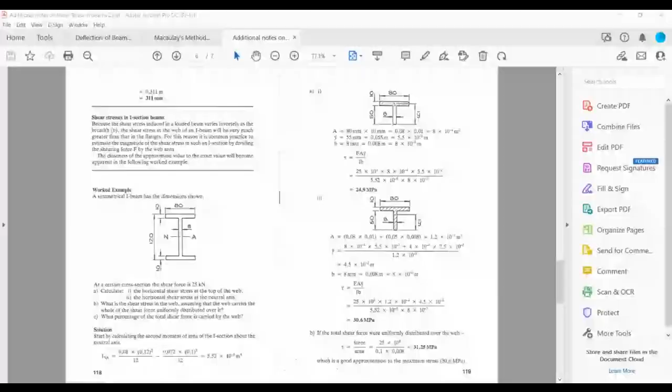Where was I now? Yeah, that answer is correct. So I'm looking for that Y bar, and it's going to be, I'm just getting my distance in 25. Okay, cool. So if you divide that by, and of course that's the total area of 1.2 times 10 to the negative 3. So can someone just give me that Y bar of those two shapes?

Then your shear is going to be this, at the neutral axis, at 25 kilonewtons, your total area is 1.2. I'm just waiting for that Y bar there.

So you can do it two ways. You can do it the way I did it, or you can just do it like this. Maybe this way is a bit better. I normally use that way anyway. And your I, we've worked out, Mr. Minus, worked it out to 5.5. So you can find the central axis of this particular thing, and then just use that with the total area. It's 5.52, and then obviously we're within the web, and that's going to be 8. So you guys can do this, fantastic.

Okay, we're moving on quite nicely. I can speed up now. Okay, so what is it, Y bar over there? Let's get my Casio open here.

It's 80 times 10 times 55, plus 8. Guys, are there any questions? Are you following what I'm doing? I know you should be following. I know no one should be lost.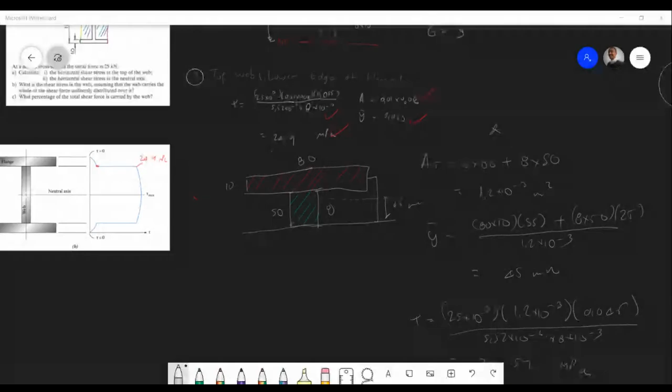So what they're basically working out here is, we've obviously found the maximum shear stress within the web, and what they're referring to is that all you have to do is now say shear V BD, and this is going to be in the web, and you're going to see how close it is. It's just like an approximation kind of setup. What is the shear stress in the web, assuming it's just kind of carrying it over. Let's have a look quickly.

And what is V? V is 25 kilonewtons. And B was... it's the web, it's 8 millimeters, which is the breadth. I don't know if Mr. Manus posted something there. And then obviously the depth is going to be just 100, I think, so 0.1. And if you work that out, you should get an answer. So let me just clear my calculator here.

The point of this is just to show if you use an average value, what answer do you get for that? 31.25, right? I wonder if that's the correct answer. Yeah, you get 31.25. Okay. So what you're just saying is that if you just assume over the mean area, and if you compare those two values, it's roughly the same. I can't tell exactly in terms of percent, but obviously this is the more accurate approach over here. So 31.25 megapascals.

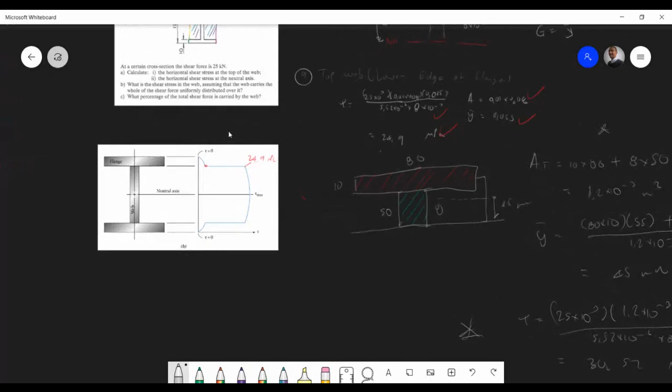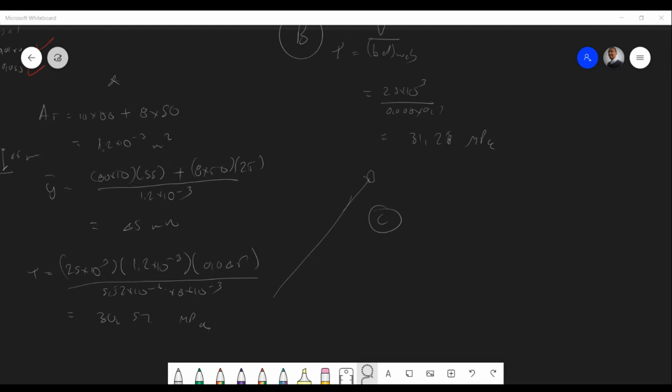So we need to find the shear stress at this particular point, at this particular junction. Let me just quickly show you - I can talk through it here instead of working it out.

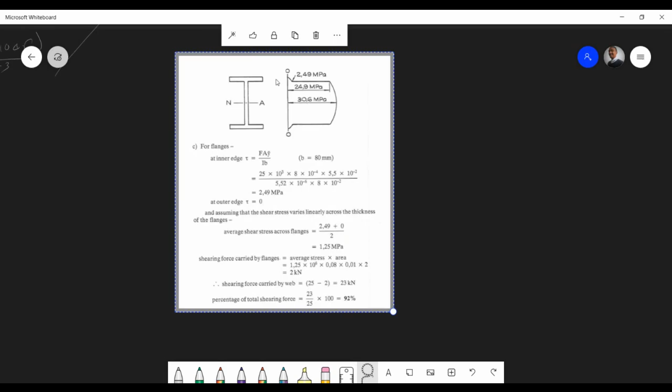I'll go to the note and show you, because I don't want to spend too much time on this. If you can do this, it's not that difficult actually. So I'll copy the solution over here. What you're required to do, and what you must be cognizant of, is you need to find the shear stress within the flange itself. That's the first thing, right?

The only difference between this and our previous equation, the first one we did, is that instead of 8 millimeters, we're going to use 80 millimeters as your breadth, right? So we're finding this point over here - last time on top of the web we used 8 millimeters, and now we're using 80, since this is within the actual flange.

And we have to find the stresses on top and the bottom of the flange. Obviously on top it's 0, like I've mentioned, and 2.49 on the other side. So we have to find the average shear stress across the flange, and that's quite easy - you guys can figure this out. You divide that by 2, and you get 1.25 megapascals.

What you then do is find the shear force, V, which is that stress times the area of the actual flange. 0.08 times 0.01, that's the area of the flange itself, and you're multiplying it by 2 because there are 2 flanges on top, and you get 2 kilonewtons.

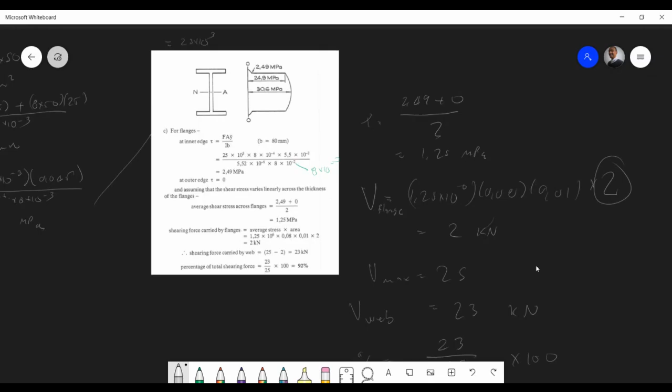So again, I'll recap. All you're basically doing is finding the stresses on the flanges. You find the force within the flange, which is 2 kilonewtons, and you're subtracting that from the maximum 25 to get 23, and that 23 will be the web. Remember the web in this case carries most of the shear force, and then divided to get 92%.

There is another approach we could have done, and that's with integration. Is there any question to that? I don't want to spend too much time on something you can actually play around with and figure out. Was my explanation at least clear?

Yes, go for it - if you were to rotate that I-beam like 90 degrees, so instead of seeing it standing vertical, it's horizontal. Yeah.

How do you find out what percentage of the load the web is carrying? Because now the flanges will be taking all the load. But shouldn't you be doing all the same stuff then? Isn't the error going to change? Nothing's going to change.

I'll never give you something like that, just so you're not worried. The I-beam will always stand like that because that's how I-beams are designed. But if you load it up inverted, then obviously it's inverse to this, and this part is going to carry most of the load. You just have to work it backwards.

What I'm making you aware of is that you guys should focus on this question and know the procedure - you'll just get a different beam. The other alternative to find how much the web is carrying is to use integration, which we'll be using anyway in the next chapter. So there is an alternative approach.

The reason this approach is here is to show you - one is more algebraic, and this is more integration based. They're both the same thing essentially. Just make sure you understand the procedure of how to solve it. It's always going to be the same, literally all the same.

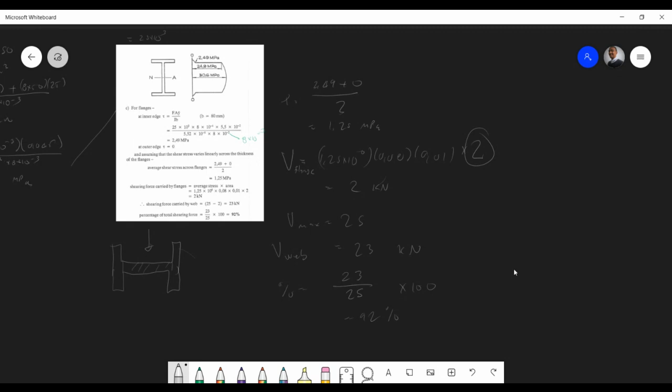Not a difficult chapter - please do not make it difficult. There's no tricks involved, I'm telling you now. Make sure you go over the work, because I get very hurt when I see my students fail. It really makes me wonder, what are you listening to?

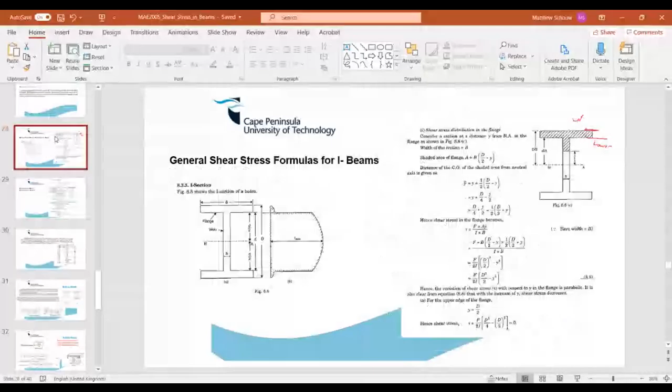With the same stuff I mentioned to you, here are some formulas you can use - I'm not going to give them to you directly, so make sure you play around with them. I've delineated for you - make sure you know your rectangular beam, make sure you know your I-beam.

In the next session we're going to do built-up beams, which should be nice and quick. Hopefully we can do 2 examples - the first will be your first class test solution, the second will be an area question that some people couldn't even get, shockingly.

We're going to include the second part of the question, basically where the new part is - the shear stress. It's actually very easy, just a few things you must be aware of. I've got a few questions posted on Blackboard, some test-level type questions. Again, what I'm making you aware of - I'm going to say this again.

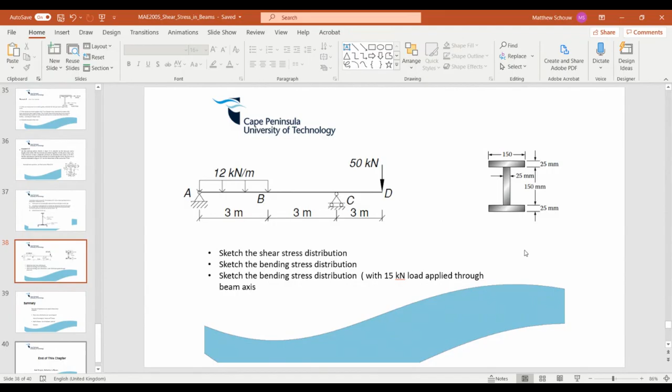You're going to get some I-section like that, you're going to get a beam, you've got to work out the shear force, and then you've got to use the procedure I've taught you to analyze that. Is it all clear to you guys?

There's no tricks - the only trick is changing the beam, and I can change the beam to whatever I want. So I don't want people to fail. Make sure you master this thing very well, make sure you know the procedure. Obviously you have to sketch the distribution, and the nice bonus marks will be to calculate the percentage shear force within the actual thing.

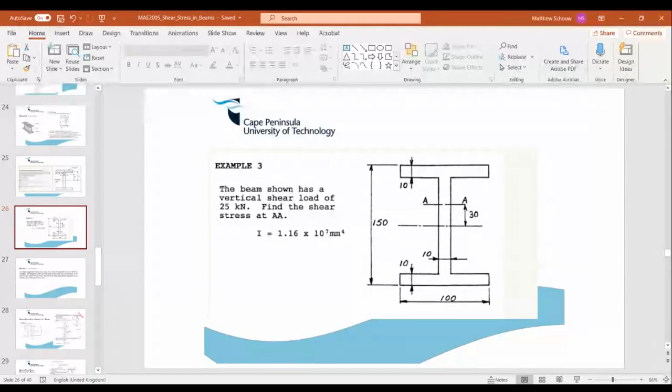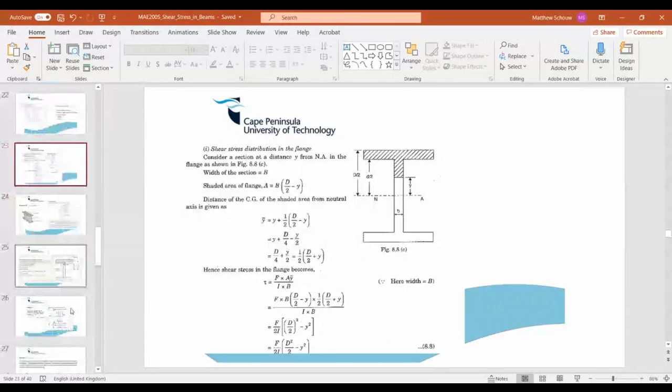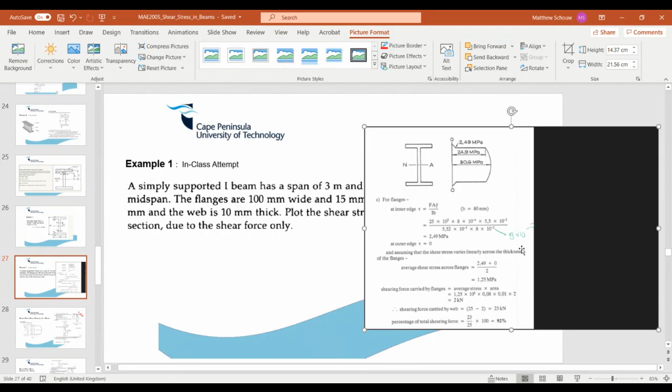Obviously you need to work out the inner part of the flange there. The answer is actually there if you look at it. So use this approach to do example 11.3. This part is bonus marks, for the men and the women, but if you can do it, fantastic, you get your marks. Always know that most of the shear force is carried by the web. If you're getting something wrong there, it's a problem.

Mr. Kiefer, how long should we have a break and then come back? Thank you, Mr. Demanis. I don't know if it's an old one here... well, it's a new one here.